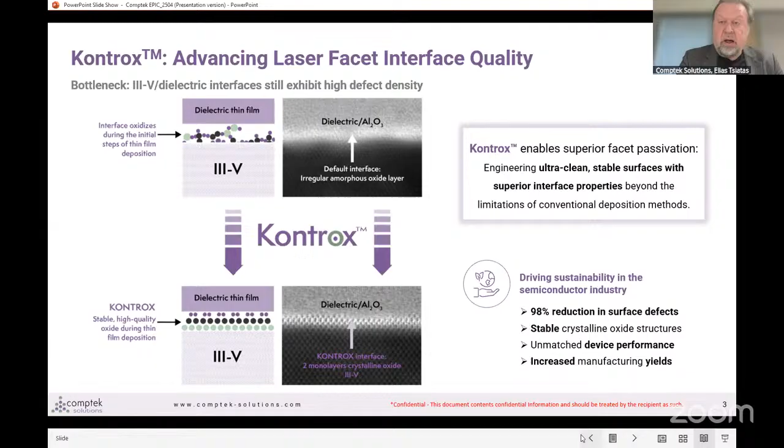The structures or the architectures where you can apply our technology are sidewalls, mesa sidewalls, then of course the laser facets, also interfaces you can find in transistors, also substrates. And we speak about different combinations of compound materials, gallium arsenide, indium phosphide, gallium antimonide, but also gallium nitride, and so on. Also, by the way, important to know that aluminum-containing materials are also something we can handle with our technology.

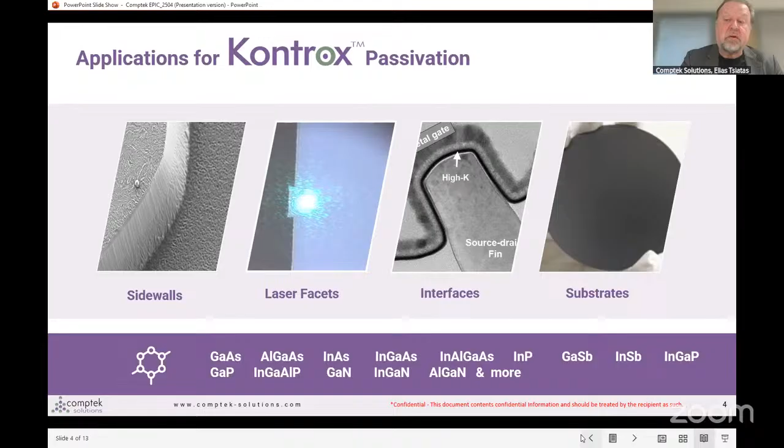If I go now to details of the system we want to introduce today, that is dedicated to laser bar facet passivation. You can find the two chambers, the processing chamber, where you have the RF plasma source. Then you have the heating system where you control the temperature, of course. Then we use spectrometers to monitor the processes, and the e-beam evaporator.

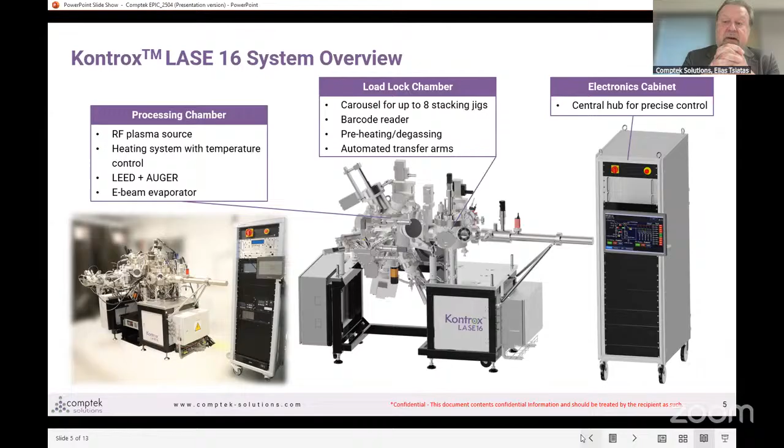Then in the other chamber, the load lock chamber, there you can find the stacking jigs. So we have up to 8 pieces. Then the barcode reader, the degassing preheating system, and the transfer arms that are also automated, and we control, of course, the whole process, the two chambers, using the electronic cabinet that comes with the whole package.

I would like to emphasize 5 main characteristics of this system that make it very interesting for the laser industry. Of course, the first one is the passivation quality that is very comparable to the high quality industry standards like zinc selenide, but at a remarkable value to cost ratio. So we speak about a clear competitiveness in terms of finance.

And the other thing is the multi-process chamber makes the whole system very compact because you do all 3 processes, the cleaning, the passivation, and the sealing, within the same ultra-high vacuum system. Then we offer high throughput. Of course, it depends quite much on the size of the laser bar, but from the laser bars we have seen in the industry, we can go up to 1,800 laser bars per day. Please remember that we have the 8 stacking jigs in the system, and this, of course, helps to have a high throughput.

But from the feedback from customers, I would say one of the most important is the laser facet stability, because the passivated facets now are so stable that they remain in a very high quality for days, I would say even for weeks. So we remove the time pressure and we improve the flexibility when the customer designs his plan, when he's going to plan the mirror coating process. And finally, with the same machine, we can run multiple recipes for the various wavelength laser materials.

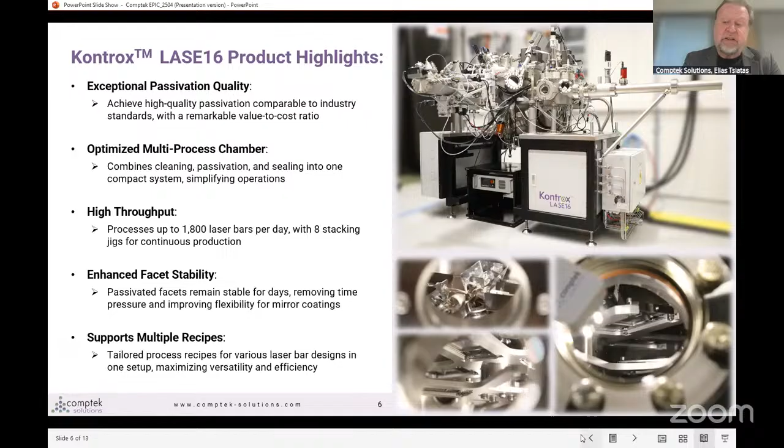One other important parameter is the uniformity. Here you see an example where gallium arsenide is cleaned. We have a 6x6 reconstruction across the whole sample area. And then if you monitor, we have reduced the oxygen significantly together with the carbon. They are on the bottom of this graph. But at the same time, we have a very nice, almost one-to-one ratio between gallium and arsenic all over the clean surface, which you can see on the top of the graph.

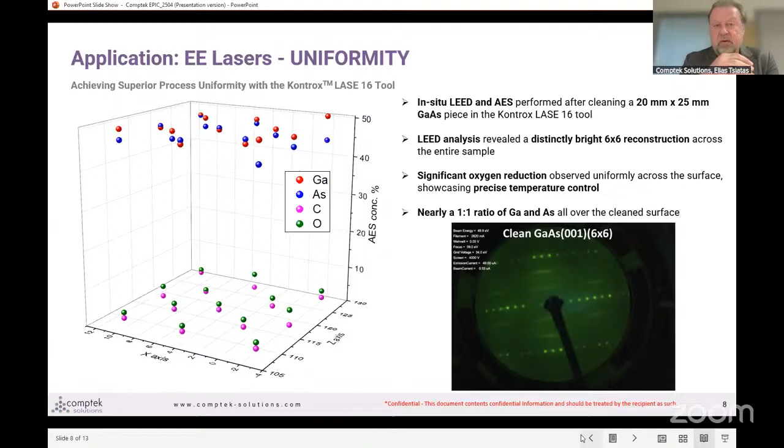And finally, the thermal distribution. We have software, of course, to track the temperature distribution in the laser bars. In this test, we have used 210 stacked silicon spacers, and we have reached a very nice uniformity, I would say, both in X and Y axes. And of course, we know that there is room for further improvement through some optimizations that we're going to do.

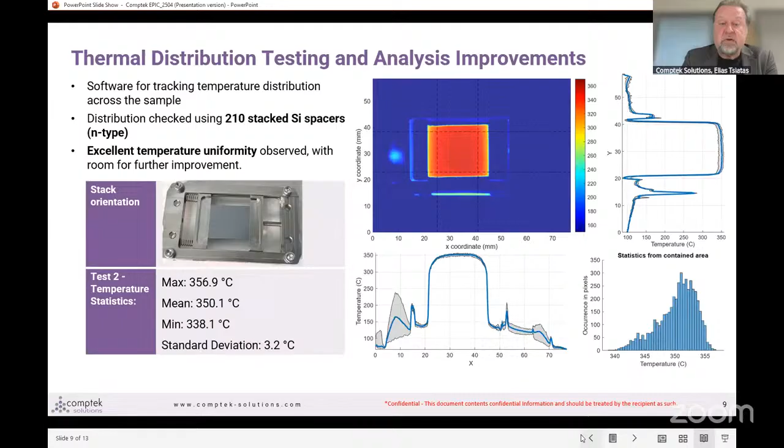As an overview, I would say that the Kontrox quality is high, at least similar to the zinc selenide system well known in the industry. But at the same time, our Kontrox offers a high throughput for mass production purposes. And also very remarkable, as we have noticed in discussions with customers, is the cost of ownership, which is competitive against the existing methods.

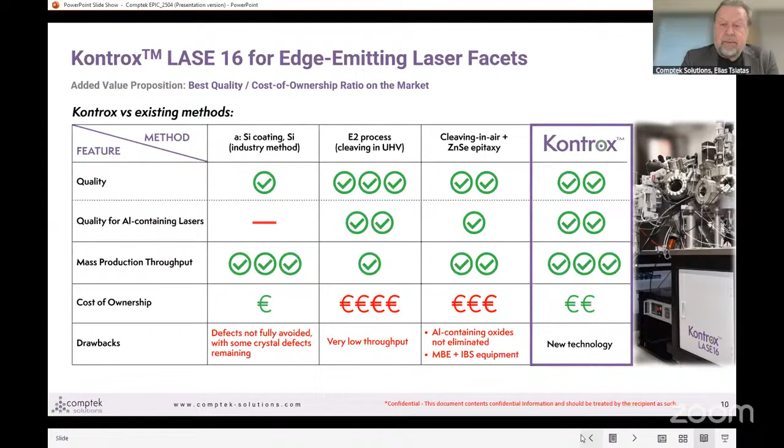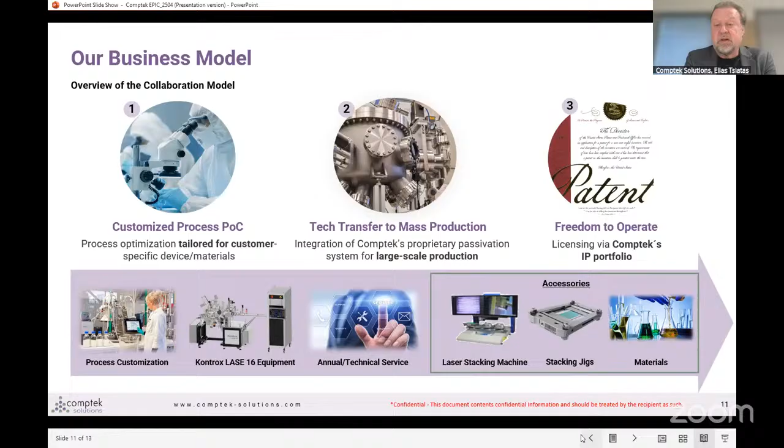Finally, a review of the business model: the customers will send us the laser bars. We do a proof of concept where we demonstrate the efficiency of the technology, and then we optimize the process for a technology transfer to mass production that includes not only equipment, but also the annual technical services and some accessories. And of course, by doing this, there is also freedom to operate, because it's the license to use the Kontrox technology. And I want to close the presentation with a very short video of the system.

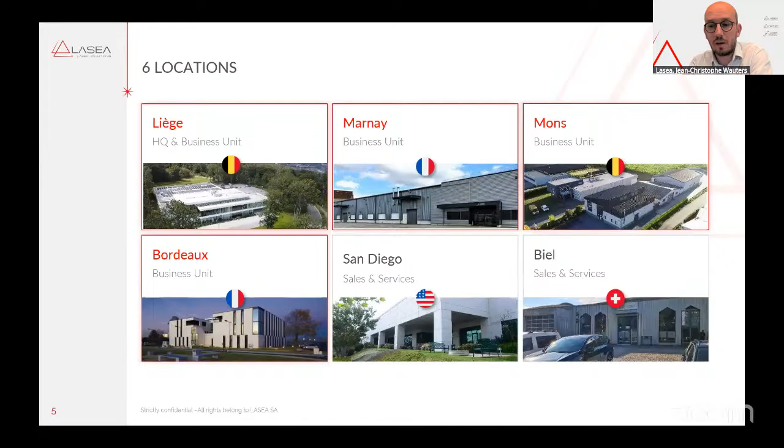So we have different markets. As Antonio told you, I'm responsible for luxury, but we also have electronics and medtech. Luxury, for LASEA, is mainly the watch industry, the Swiss watch industry, but not only.

We also have machines in the watch industry in Japan and in other countries in Europe. So electronics is more Asia, not only, but more Asia, and also medtech more in the US. But again, not only. Research, so it means that we also have machines in the universities and R&D centers.

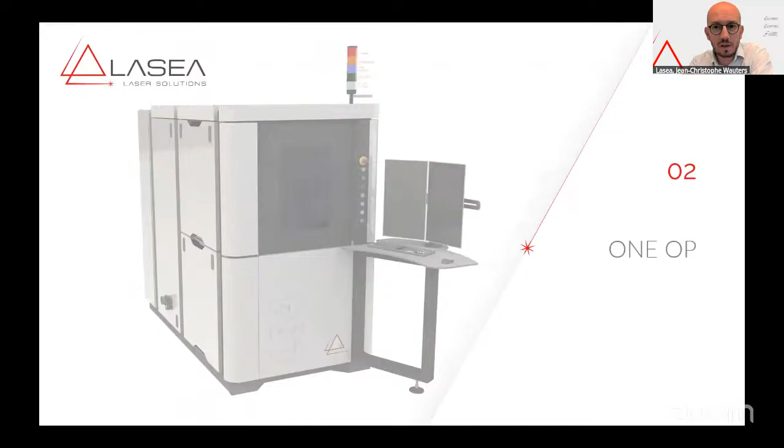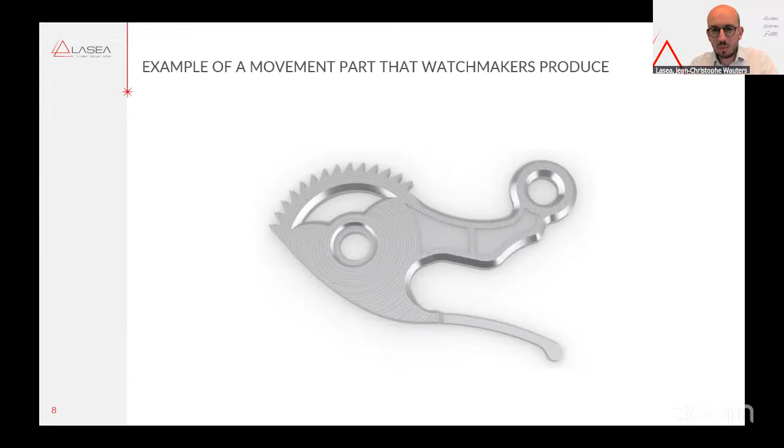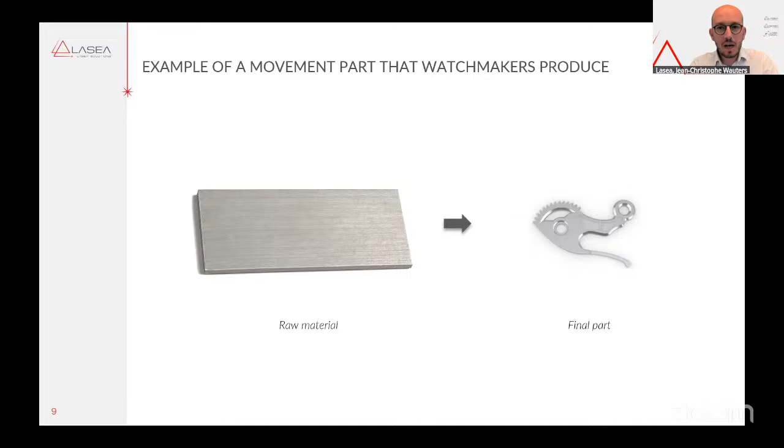So let's talk about the ONE OP. As I'm responsible for the watch industry, I'm going to take an example of a part made for the watch by the watchmakers. So it's typically a part that you can find in a movement of a watch. So how they do it today, the watchmakers start with the raw material. It can be different materials like brass or stainless steel or titanium, and they want to produce this final part that you see here. So we had a lot of discussions with the watchmakers in the past years, and they explained to us how they are producing this type of parts today.

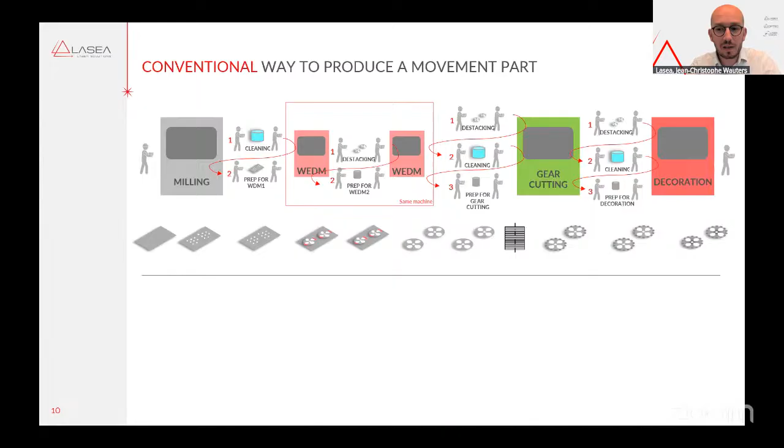So I'm not going to go into details about how they are producing those parts today or before today, because it's not about laser, but it's just to show that there are many operations, different types of machines, like milling, wire EDM, gear cutting, decoration machines. So that's only an example, but every watchmaker has a different way to produce the parts.

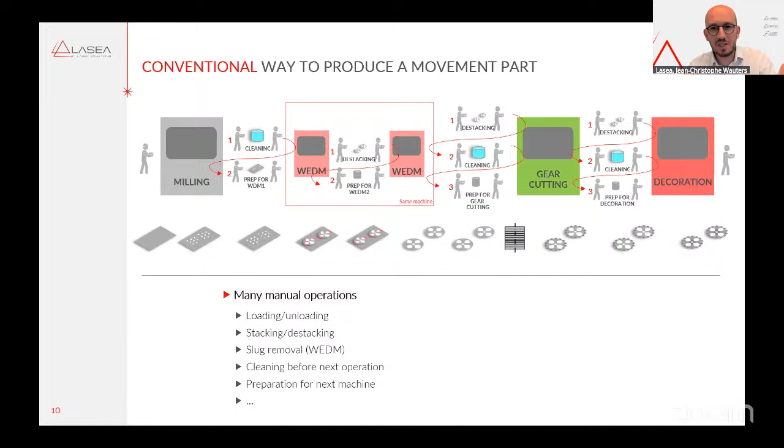So what I want to show here is that you have many machines and also many manual operations, like loading, unloading the parts from one machine to the other, go to the cleaning machine, and then put the parts again in the next machine. So it's quite complex. It works very well because they have been doing that for more than 100 years, but it's quite complex. So our target with our micromachining laser machines was to make it simpler for them.

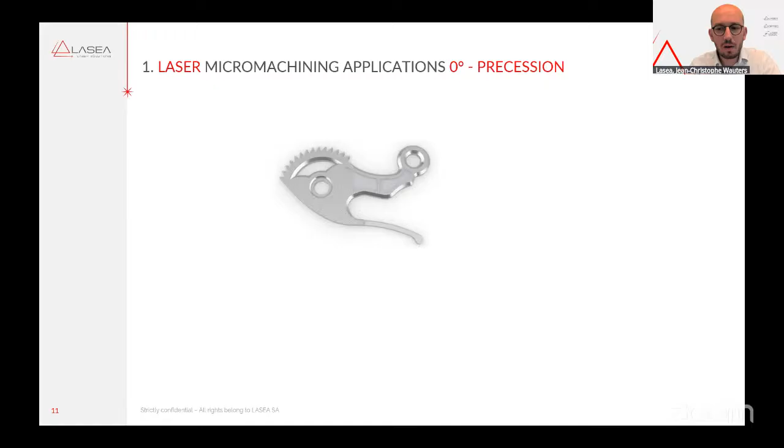So I will continue with this example of the part I showed in the beginning. With laser micromachining, you have different types of applications. So first, as you probably all know, when you machine a part with a laser, you will always have a taper. So for a gear, for example, in a watch movement, of course, it's not possible to have a taper because the gear will not work. So for that, we developed a system that we call LS Precess. It's a precession head, which will allow the laser to machine the material without taper.

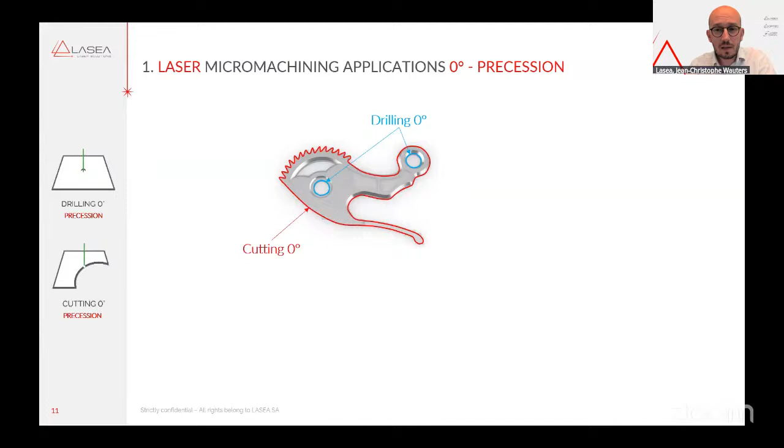So in this example, you see the part where the taper is not acceptable. So that's the drilling and also the cutting. As I mentioned before, it's very important that you don't have this taper. So how do we do that? We use a femtosecond laser. We place different modules that we develop ourselves in the beam path.

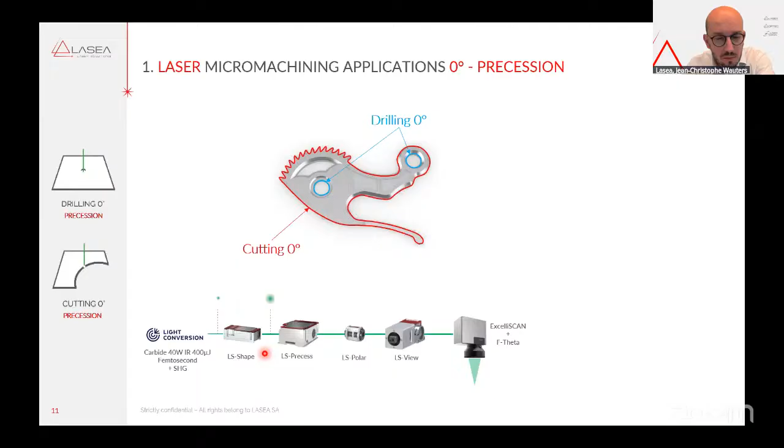So it's the LS Shape to shape the beam, LS Precess to avoid this taper, then LS Polar to modify the polarization, LS View to be able to view the part through the scanning head, and then the scanning head itself. So you see here, I'm going to use the laser pointer. You see here how the laser beam looks after the laser source. Then you will make it, for example, bigger, and then you go through the LS Shape.

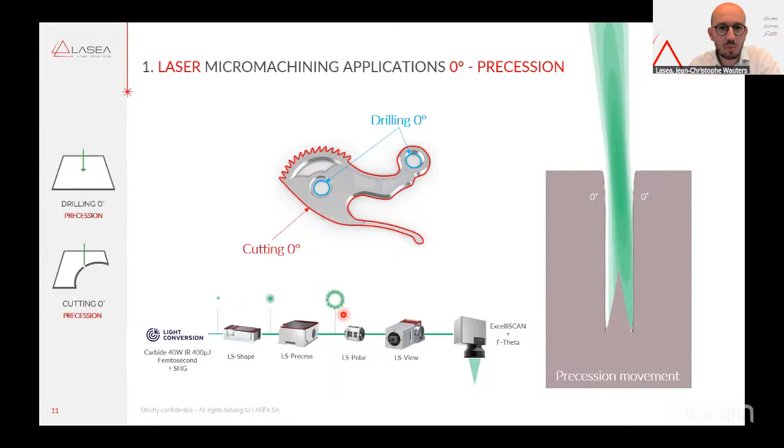So the LS Precess will transform this round shape of the laser beam into something like a donut. And it's because we give this movement, as you see on the right side of the slide, that the laser beam is moving to compensate the taper. So the advantage is that we don't have any taper anymore, but we have a donut instead of a single spot. So because of that, if you want to engrave, for example, you will have this donut. So it means that you will have a problem.

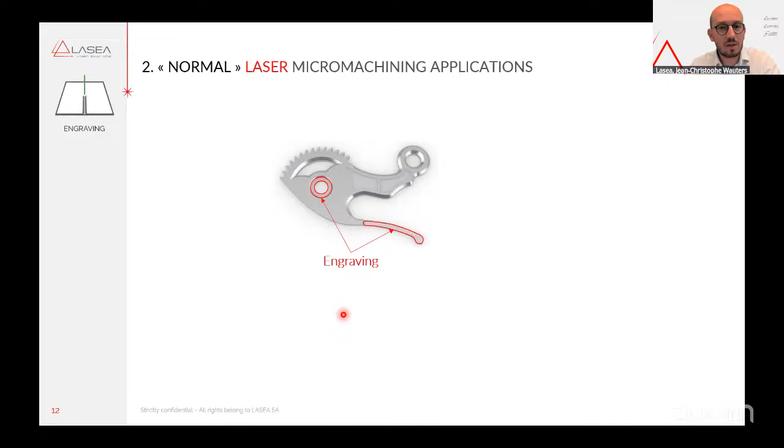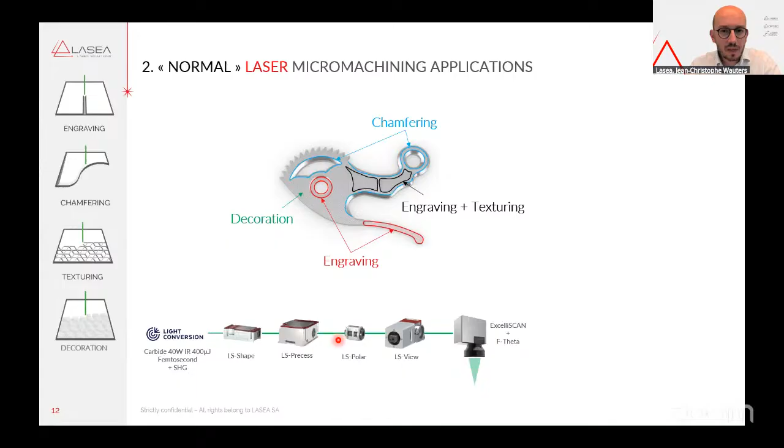You cannot engrave like a normal laser machine without this precession head. So you cannot engrave because of this donut. You can also not create the chamfering. You can also not make the engraving and texturing because of that, and the decoration, the same. So what we did, we decided to have this LS Precess, but we can bypass it. So it means that, as you can see here, we don't have this donut anymore because we have a bypass.

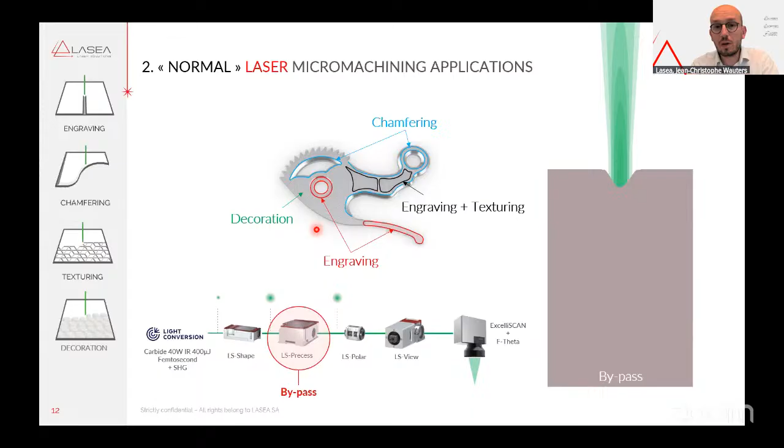So it means that inside the precision head, we can move the laser beam to another path, and then you don't have this donut anymore. And then you have a normal machine, and that's what we call 1OP, because in one single machine you can either cut or drill without taper, but you can also make the decoration, engraving, chamfering, everything. So it means you need only one single machine to machine this complete part. And that's what we call 1OP, one operation.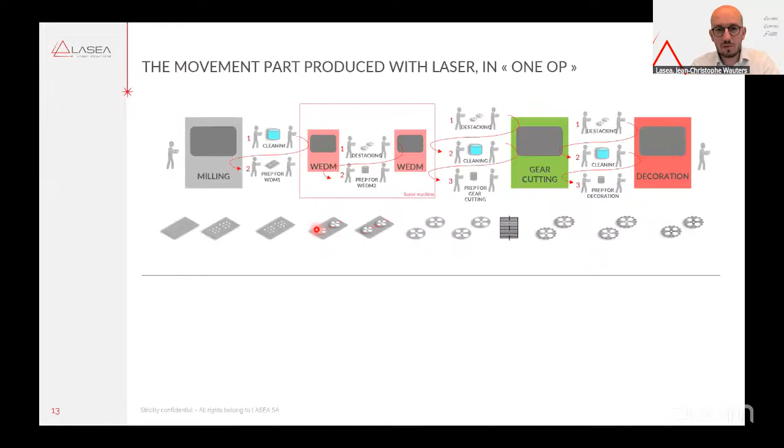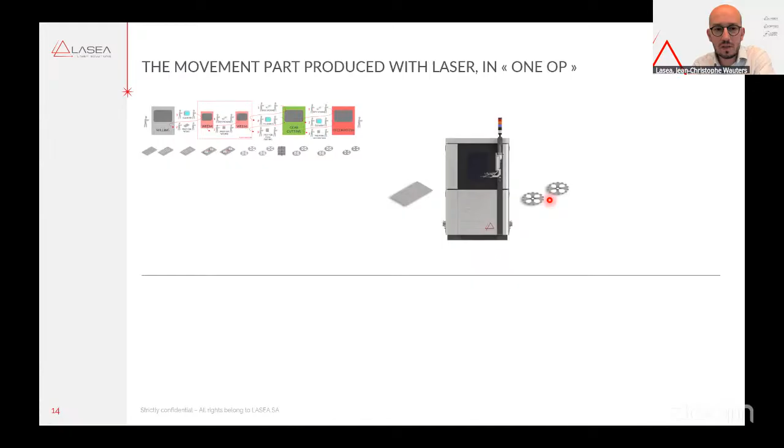So as a summary, this is how the watch industry is producing the parts today, and we make it simple. We use this machine that we call LS4P machine. You only have the raw material at the entrance of the machine, you push the start button, and you take the finished parts out of the machine. So it means you have only loading, unloading, one operation, only laser, only one machine, and then you can save time.

You can increase your flexibility because you don't need a special tool, only a DXF file. You reduce your footprint if you compare all the machines on the left side to one single laser machine. You reduce your overall investment because you only buy one machine instead of maybe 4 or 5. You reduce your energy consumption, especially with laser because the consumption is very low, and you also reduce your consumable costs. So it's really to make it simple and flexible for the watchmaker.

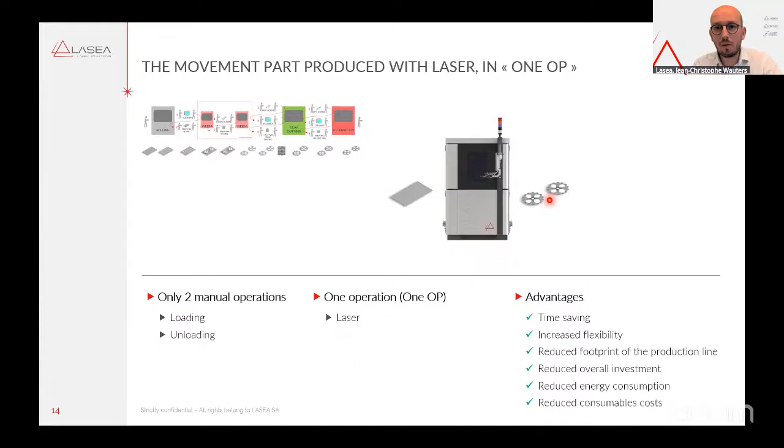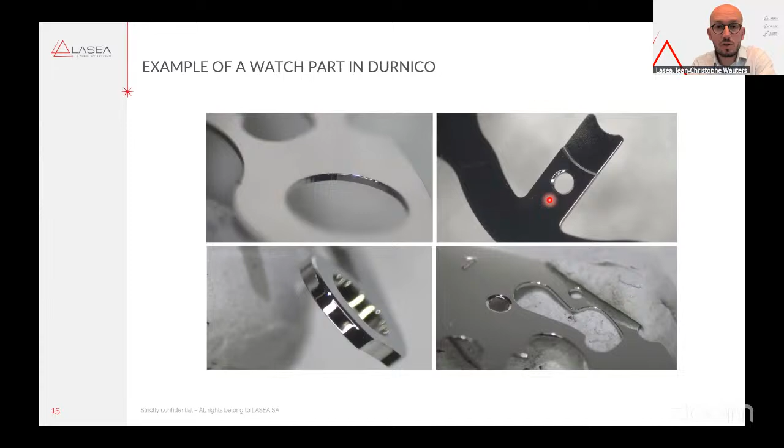So to finish my presentation, I just wanted to show you some examples of real parts, just to show you the quality that we can reach. So again, we start with a raw material, and at the exit of the machine you have this type of part. We just had a polishing and cleaning operation after machining with laser, but it's really the part that comes out of the machine after the laser. It's really the quality that we can reach, and that's what the watchmakers need.

So yeah, that's my presentation. I don't know if you have any question, and I hope it was clear and that you enjoyed it. Thank you, Jean-Christophe. So, yeah, we have time for questions.

I will start with one, and it's related to the potential number of lasers that you need inside the machine. Depending on the task, do you think that in some cases you will need to integrate two different lasers, or is the idea to have only one laser source and then play with the different modules and components?

Yeah, so a few years ago, you're right, we had to integrate two different lasers in the machine. We had one femtosecond laser, for example, for the cutting, and we also had the nanosecond laser, for example for polishing with a laser, or also to create some decoration or texture on the parts. But today, because the laser can have either femtosecond or nanosecond in the same laser source, we can use only one single laser. It's one femtosecond laser, but with an option called nano switch, you can switch the pulse duration from femto to nano, and the machine is standard.

It's a green wavelength, but we can also have two wavelengths, meaning green and infrared. If the customer needs, we can also have the two wavelengths. That was my other question about wavelengths in case different materials can be used. Yeah, but standard it's a green femtosecond laser.

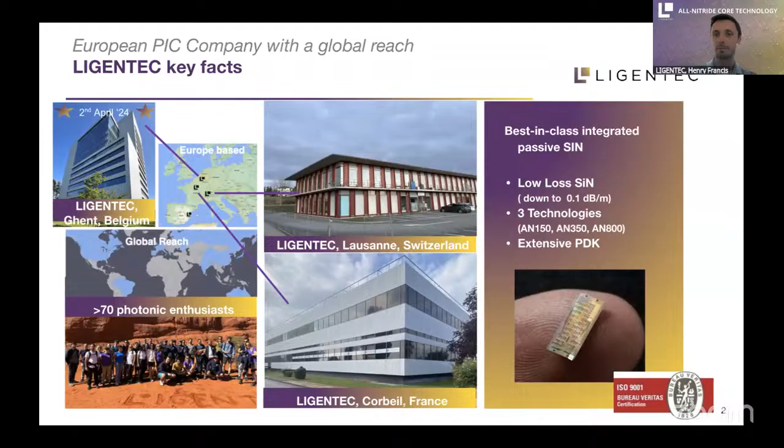So what is it exactly that we do? We have the best-in-class integrated passive silicon nitride, so incredibly low loss silicon nitride. We have 3 different technologies, which I'll talk about briefly, and an extensive PDK, so you can use our chips and our design services.

We have 2 fabrication lines where you can fabricate your photonic integrated circuits. One is for our standard technology, where we have a number of different technologies installed. These can be used for very high volume manufacturing. We also use it for pilot line studies and niche quantities. And we have an offering where you can join a multi-project wafer run, so you can take advantage of this standardized industrialized process, but with a lower cost and a lower entry barrier.

That's one platform, and the other one we have is our R&D line. Here, if you need something specialized, away from the standard, it's possible to use our R&D line to look at new concepts, to understand new technologies and new materials. The benefit is once we've developed something on our R&D line, we can then transfer it to the 200mm line, where we're able to offer higher volume and a very standardized process.

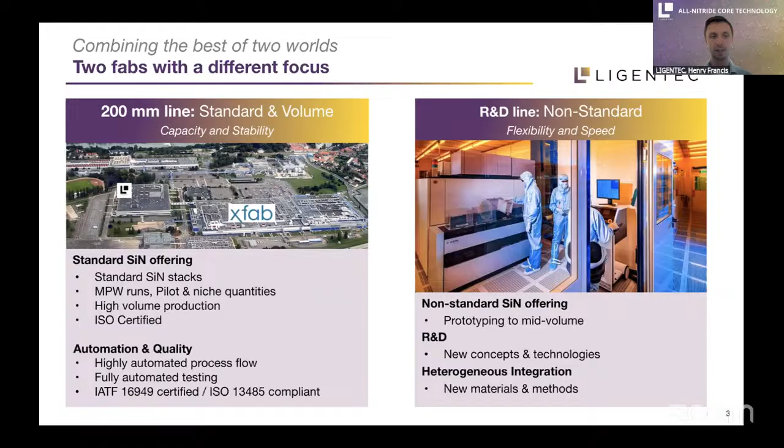Silicon nitride is a very nice platform for photonic integrated circuits because you can work at a lot of different wavelengths. It's transparent anywhere from 400 nanometers up to 3 or 4 micron. There's high power handling, and it can be very low loss.

So what we offer on our standard platform is 3 different thicknesses, aimed at different wavelengths. With the 800 nanometer platform, we predominantly aim at the C band and for doing nonlinear photonics. For the 350, this is aimed at the C band and the O band, so 1310 nanometers up to 1550, and here we have incredibly low loss - this platform is optimized for linear passive circuitry. Then we have the AN150, the 150 nano platform, aimed at visible light applications.

With each of these processes, we then add on additional modules. So you have your silicon nitride waveguide, where your light is guided through this material. We can then heat the waveguide to change the phase, or open the cladding if you want a different material integrated onto the waveguide. And we can do a partial etch of the waveguide, so you have polarization control.

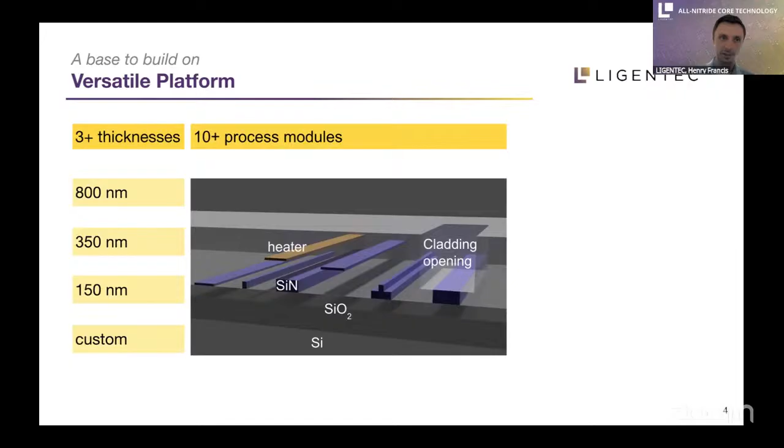So now we have these thicknesses, we have these modules, and to use this, we have an extensive PDK, which includes splitters, combiners, edge couplers. Everything has been tested over many runs using wafer level testing to ensure long-term stability and reproducibility of the circuit itself.

So this is a very nice platform. It's existed for a very long time. But the problem with silicon nitride is you can't do fast modulation, you can't do detection, and you can't do amplification of light. So how are we working to solve these problems?

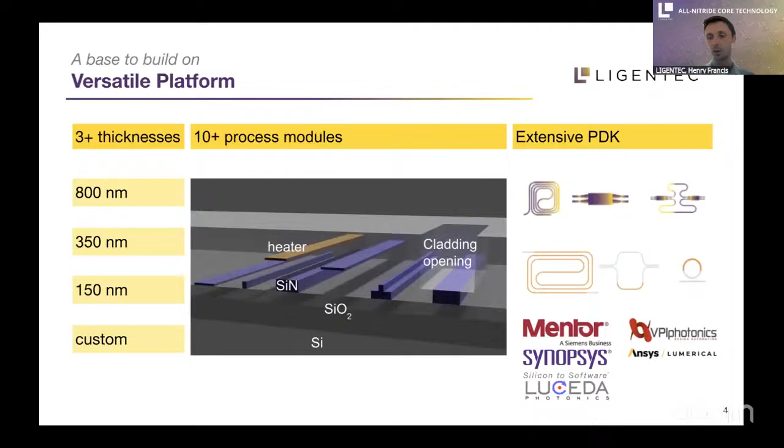First of all, we are integrating lithium niobate on top of the silicon nitride. Lithium niobate is an emerging technology, which at the moment seems to have a huge amount of energy behind it, because we can see that you can modulate your light up to 100 gigahertz, and this has huge potential in datacom, in telecom, also in space and defense, and RF over fiber technologies.

So what we've done is we've integrated this new material onto our standard silicon nitride platform. The benefit is you're able to take a platform established for many years, which we've worked on to develop a very reproducible and stable platform, and we've added this emerging technology on top of the silicon nitride to add functionality. Now you have very high speed modulators integrated onto our standard silicon nitride platform. So we take our advanced technology, add on a new innovation, and this gives us an integrated circuit where you have both materials integrated into one chip.

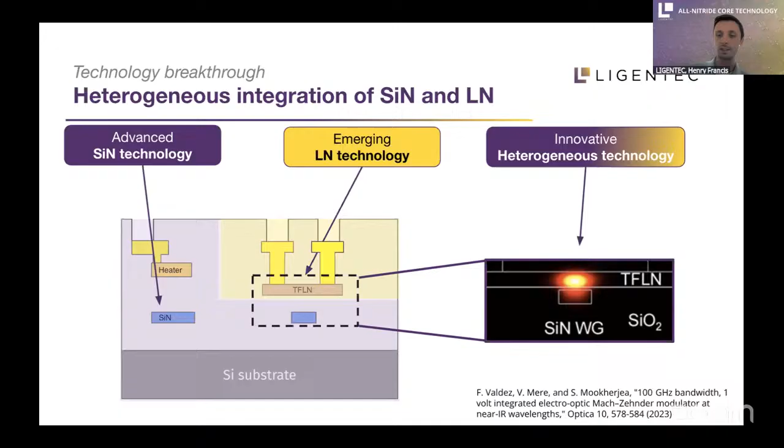So what's available, what's on offer from us? We have this very stable silicon nitride platform now with high performance electro-optic modulators in a robust, reproducible and reliable PDK.

How can you get access to this? There are two different ways. One is through dedicated runs - you can come to us with your design, we fabricate it for you, and this can start at any time. We also have multi-project wafer runs with fixed deadlines, the next one being the 15th of May. If you want to join this run, there's still space available, so please contact us. The next multi-project wafer run will be in September of this year.

Just to look at another integration concept we have - that was obviously for modulation, but we also have photodiodes integrated onto the same platform. So here you can not only modulate your light, but also detect your light on chip.

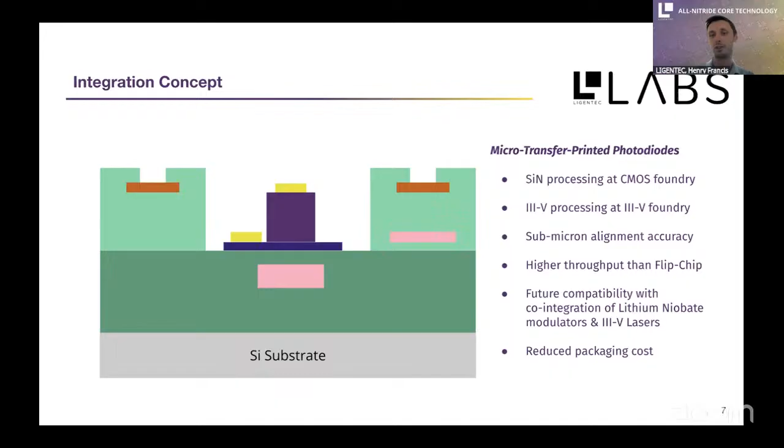In this method, we use micro-transfer printing. We take the photodiode from a wafer and we print it onto the waveguide. This has very high alignment accuracy, incredibly high throughput so you can have many of these PDs put onto your chip, and it reduces the effort required for packaging.

The benefit of this platform is that we can use our standard silicon nitride and add photodiodes on top of it. Again, for key dates - for dedicated runs, this can start any time, and our next multi-project wafer run is starting in October.

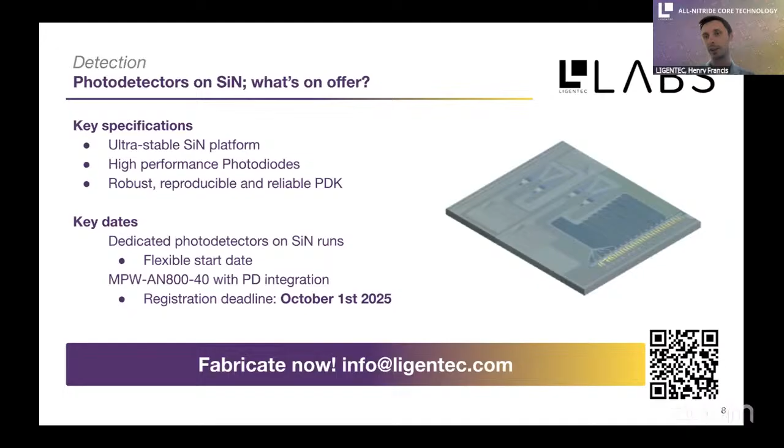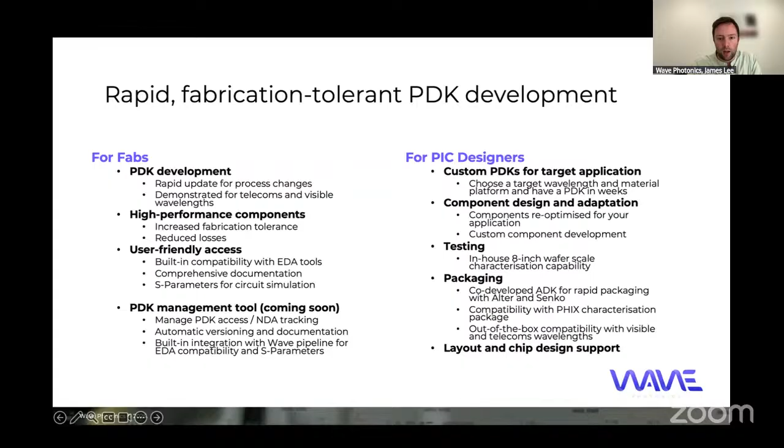So this maybe for this audience is a bit basic, but really the problem we're setting out to try and solve is to help reduce the number of iterations that are needed to get a functioning PIC product. And this is especially true for the applications where you need to design your PDKs from scratch.

So most of the foundries have their own PDKs. They're improving all the time, but they're primarily designed around the telecoms bands, because today that's where the largest portion of the market is. And that means if you want to work away from the telecoms bands, you need to do the development from scratch.

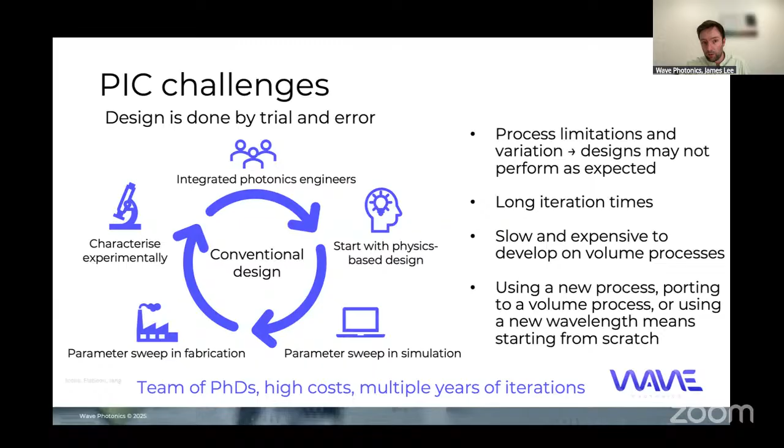So our core technology is this pipeline for PDK development. And what I mean by that is we start by characterizing the fabrication process. So we get some information from the foundry, and we also run a test run to get some information on our dedicated training patterns. And that forms a training data set for a fabrication process model.

So that means for a given foundry, we can know for any target design, how is that design likely to come out when it's manufactured? And more importantly, what's the space of ways that that design can come out when it's manufactured?

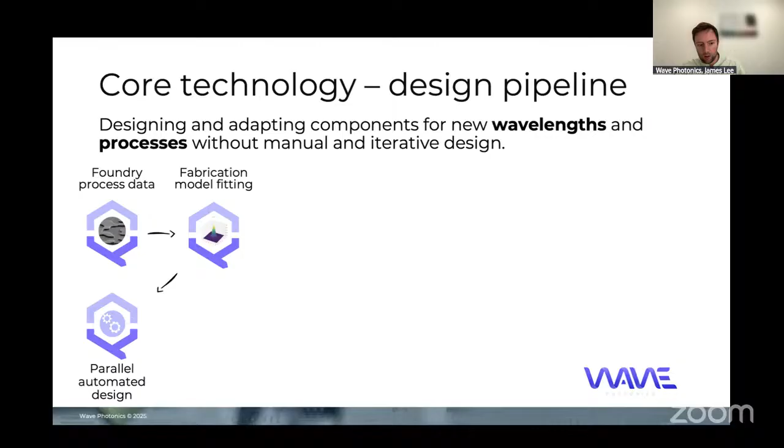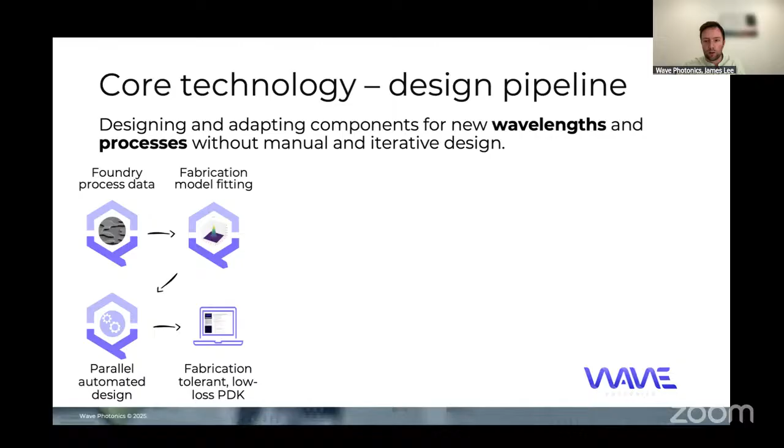So that then sits as a layer within an optimizer that lets us optimize a component design for some target specifications for the range of ways that we expect that to come out when it's manufactured. And because we can do that massively in parallel, it means we can take a preset library of components and optimize them all in one go.

So from there, that gives you a library of GDS files that can be usable. But to make it easier, we integrate that with several of the EDA tools, and this list is growing over time. So what that means is from our website, you can download a package that just plugs into any one of these tools, along with documentation, assembly design kits, tutorials, and then all of the PDKs have detailed version histories.

And then lastly, we close the loop with wafer scale measurement. We need statistical data on these components. So we have an automated but very focused testing system to get a high volume of data.

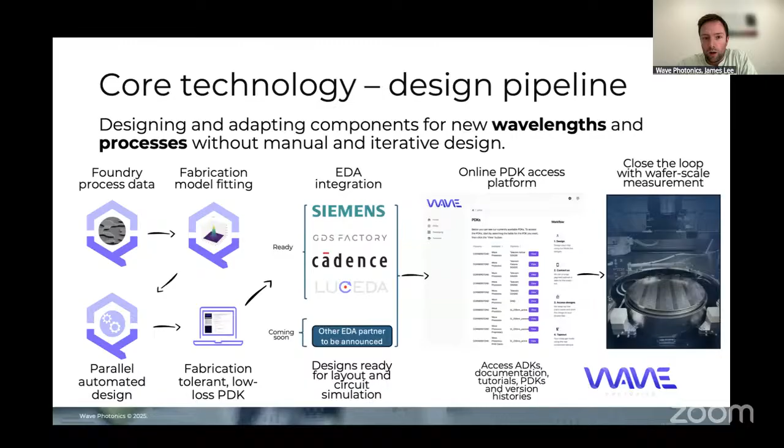So putting that all together into the product release for today, this is our SiNQ PDK. It's a PDK developed on a 200 nanometer silicon nitride process. We picked 200 nanometers because it facilitates wavelengths right from the blue-green into the telecom C-band. We co-developed this process with Cornerstone and used the rapid turnaround time to help optimize the process parameters there.

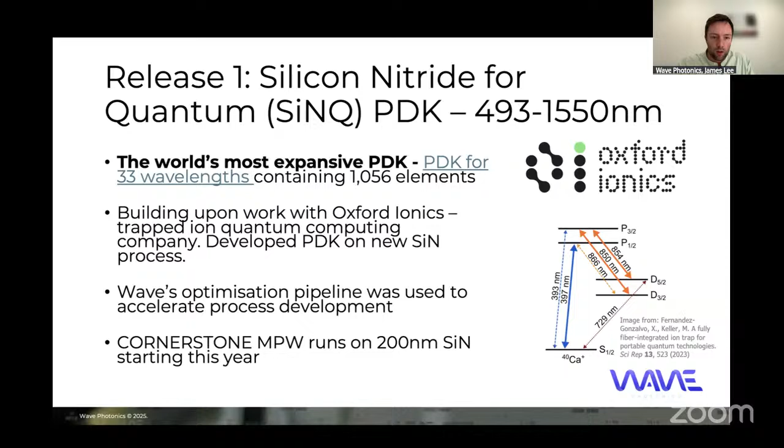So this PDK allows on the same process to address 33 individual wavelengths targeted at the transition lines of a range of quantum systems, and this will be available on Cornerstone's visible wavelength silicon nitride process, which has its first MPW runs later this year. We also did the same thing for the telecoms bands across 4 different fabrication processes.

And then lastly, all of these PDKs are compatible with our packaging templates, which means for any wavelength or any process you choose, the input and output couplings are optimized for the relevant fiber modes and fiber arrays, and can be packaged in a simple predefined way with Alta and using Senko's fiber arrays. So thank you. That's it.

So in this talk, I will talk about hyperspectral imaging in particular. So what's spectral imaging first? I think that many of you already know. Just to clarify, here in the slide, you can see the difference between RGB imaging, multispectral, and hyperspectral. The differentiation between these 3 areas is the number of bands that the device can measure. So RGB is the simplest one, of course. Every camera is an RGB system that we're used to, so it measures 3 bands in the red, green, blue.

A multispectral system refers to a system capable of measuring a discrete set of bands. Typically, this is something between 5 and 20, whereas hyperspectral means the capability of measuring the continuous spectrum for each and every pixel of the image. So many more bands, hundreds of bands. And so we are going to focus today on hyperspectral.

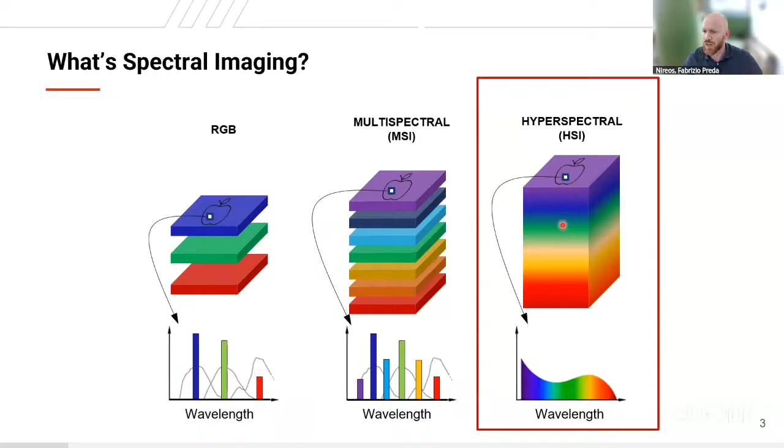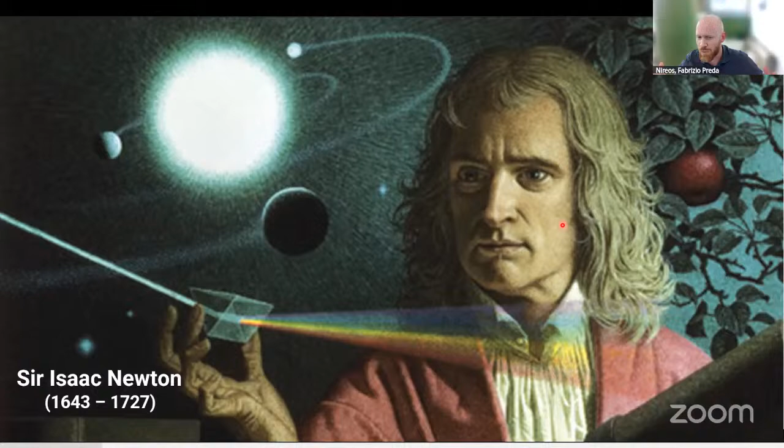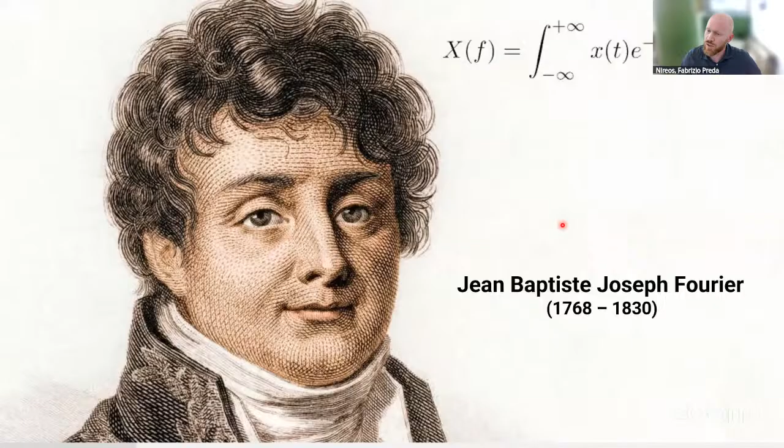So there are many different ways and companies producing hyperspectral images. Some of them rely on the so-called dispersive approach. So they follow the suggestions by Sir Isaac Newton, who discovered that white light is made of different colors. And so these devices are based on gratings or prisms, such as common spectrometers based on gratings that everyone knows. But we have decided not to follow the suggestions of this guy, rather to follow the suggestion of this other guy, Fourier. So all our hyperspectral systems work with a Fourier transform approach.

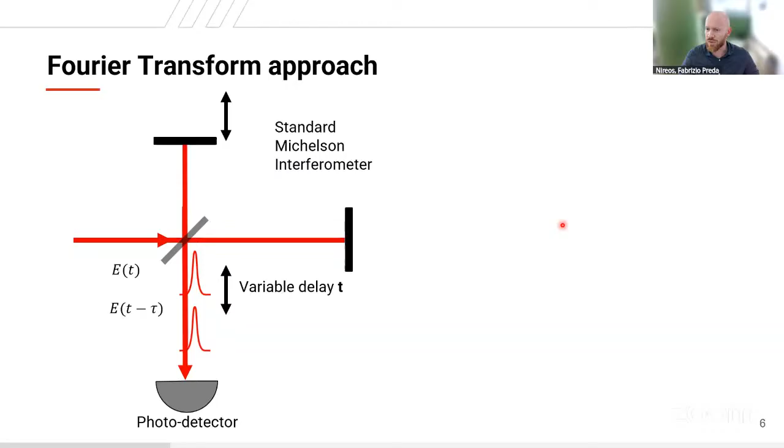This is the schematic of how the Fourier transform approach works, depicted with a conventional and easy schematic with a Michelson interferometer. The idea for measuring the spectrum of light with this approach is to use an interferometer to create two replicas of the light. The two replicas have a delay which is scanned, and by measuring the intensity signal as a function of the variable delay between the two replicas, one can measure this interferogram pattern, which is the autocorrelation of the light. And by performing the Fourier transform of this signal, you get the spectrum of the light.

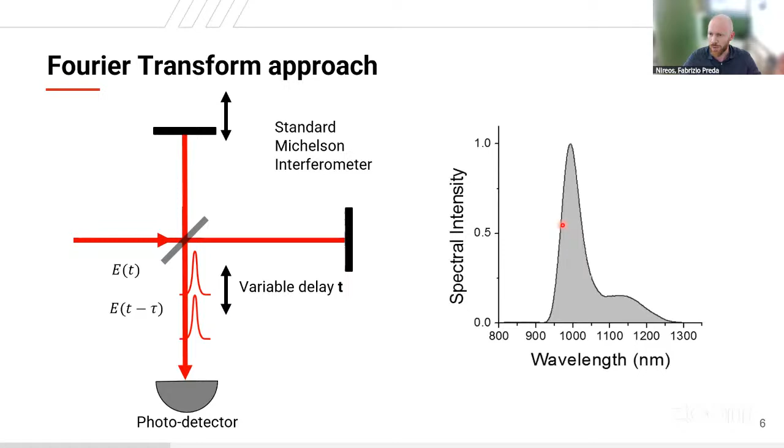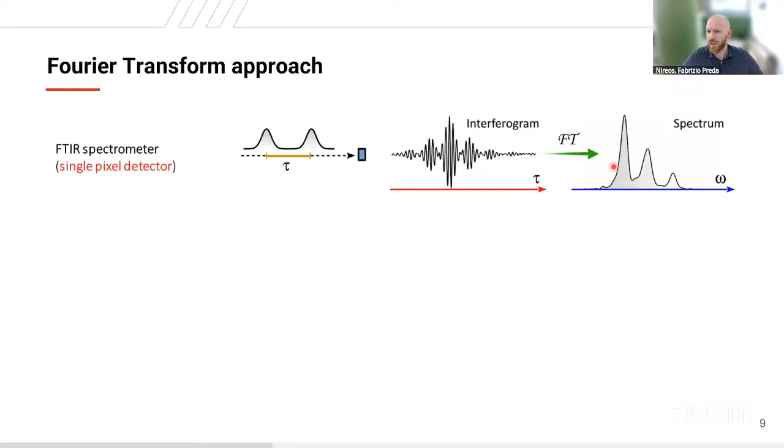It's a spectrometer, an FT, not FTIR, because it works down in the visible or UV, so it's an FT-UV-Vis-IR, if you want. It employs the Gemini interferometer. So this is a single pixel spectrometer.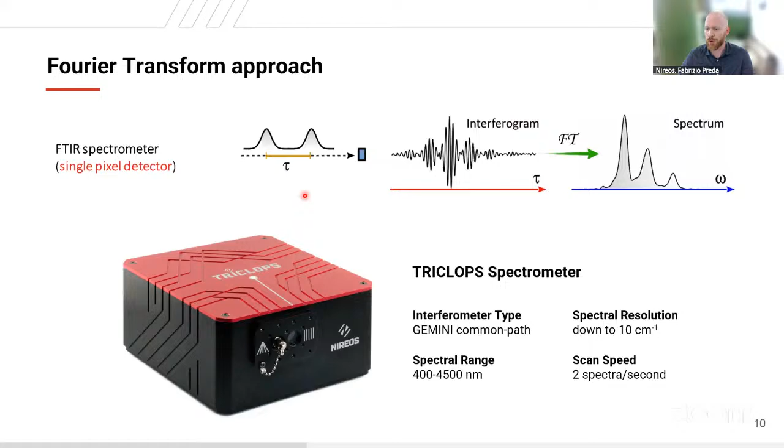But now, what happens if instead of a single pixel photodiode, we employ an imaging lens or objective and a 2D sensor? Then we can parallelize the measurements of the spectra for each and every pixel of the sensor, so that each pixel of the sensor, like a CMOS, can measure the interferogram, and then performing one Fourier transform for each pixel, you get your spectrum for each and every pixel. That is the hyperspectral data cube.

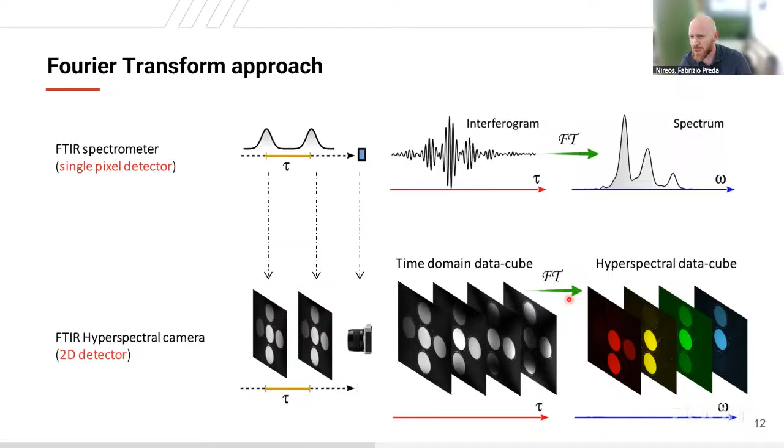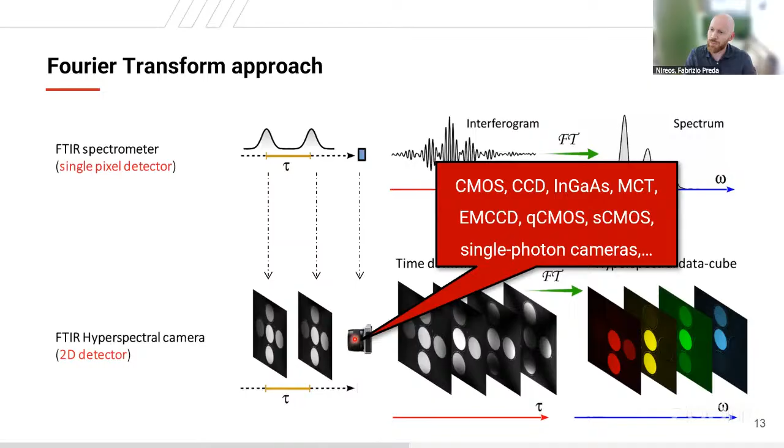So the sensor can be of any kind, can be a CMOS, CCD, InGaAs, whatever sensor you want. And so you can develop a hyperspectral system based on this technology. That's something we have already done by selecting some sensors to be integrated in our commercial hyperspectral systems. So we coupled Gemini with the lens and the sensor.

So we developed a hyperspectral camera, the Hera VNIR, with a silicon sensor. Then we have a model from 900 to 1.7 based on an InGaAs sensor. Based on an extended InGaAs, we have the extended SWIR camera up to 2.2 microns. And then we have the brand new Hera VSWIR using the new Sony sensor, the IMX990, which is capable of measuring the full range 400 to 1.7 in a single scan. So that's a pretty revolutionary product.

Nowadays, people that want to measure from 400 to 1.7 need to use two different cameras and then try to stitch together spectra obtained from different devices. While here you have a single device, single sensor, single scan, so everything is much simpler.

These are the main features of the camera. It has a very high spatial and spectral resolution. The spatial resolution is simply given by the sensor and the lens, and the spectral resolution is given by the interferometer. It's a static approach, so you don't need to scan the camera or move anything else. This is not so typical in hyperspectral imaging, so in some applications this might be convenient.

It has a very high optical throughput. Again, the Fourier transform allows you to avoid using slits or gratings. So you have a very high light throughput, enabling low light illumination conditions or fluorescence measurements as well. And it has a variable spectral resolution that can be varied by software, basically.

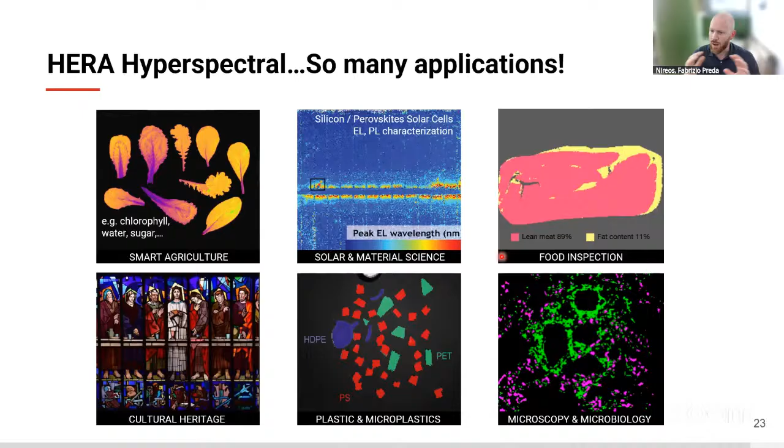You can check the thickness of layers deposited on top of the different silicon wafers, of course, or in microscopy, if you want to really map your material and optimize the process for growing the next generation material for solar cells, such as silicon and perovskite tandem solar cells. Then microplastics, plastics, food inspection, microscopy. So many applications are unlocked thanks to this technology. Of course, depending on the application, the different spectral ranges might be more or less applicable or helpful.

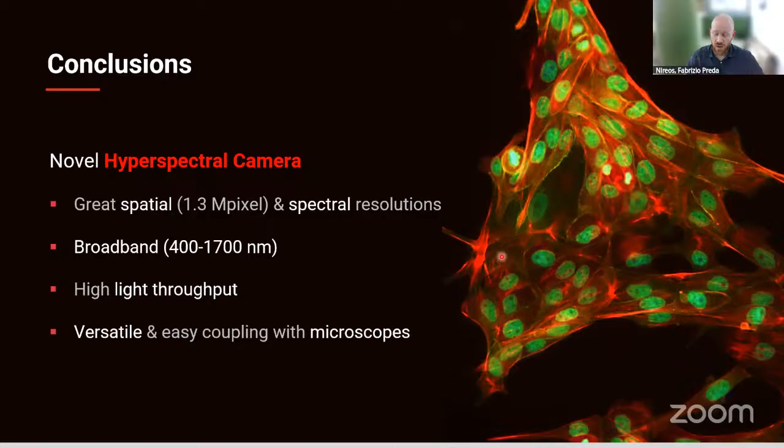So that's the conclusion of my presentation. I presented you a novel hyperspectral technology, and more specifically, a device based on this technology that allows you to measure over a broad spectral range, 400 nm to 1.7 micron, with a great spatial and spectral resolution and very high light throughput. And the system, as I showed you, is really super versatile and can be coupled also with microscopes. So with that, I hope I managed to be on time, and I thank you all for your attention.